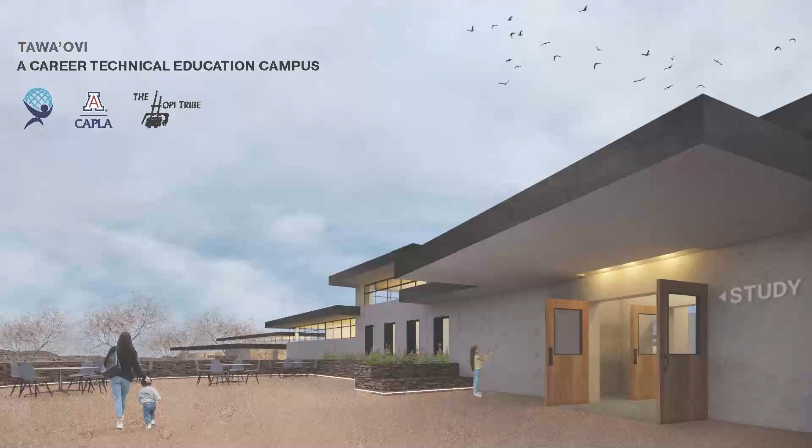The University of Arizona would like to introduce the Tawaovi microcampus. In January of this year, the University of Arizona solar decathlon teams visited the Hopi Reservation to meet our clients for this project, the Hopi tribe of northern Arizona. They invited us to propose a potential design for a microcampus at Tawaovi, their new off-grid community.

While on the reservation, we were able to speak with clients and local community members to gain a better understanding of the vision for this project. Here, we were introduced to many people, such as Andrew, who had been a key advisor for our team on the Hopi perspective throughout this project.

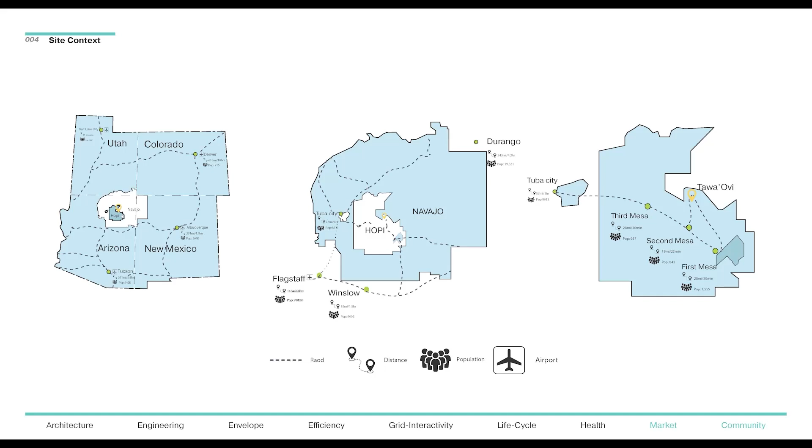To give context, the Hopi Reservation is located on the Colorado Plateau of the Four Corners region. The reservation is about equidistant to local cities such as Winslow, Flagstaff, and Durango. Our site is on the north of the reservation, away from major population centers in 1st, 2nd, and 3rd Mesa. The reason for this is that our client, the Hopi tribal government, chose to build Tawaovi outside of clan-owned land to protect ancestral boundaries. The blue area on this map is clan-owned. These lands surround historical major population centers that local leaders have maintained for centuries.

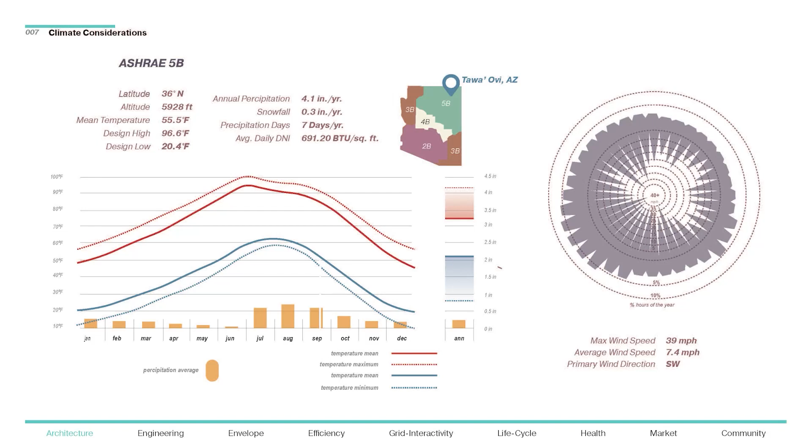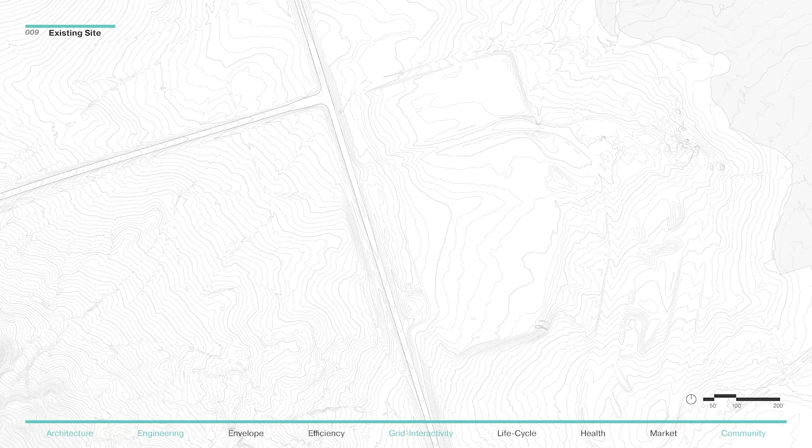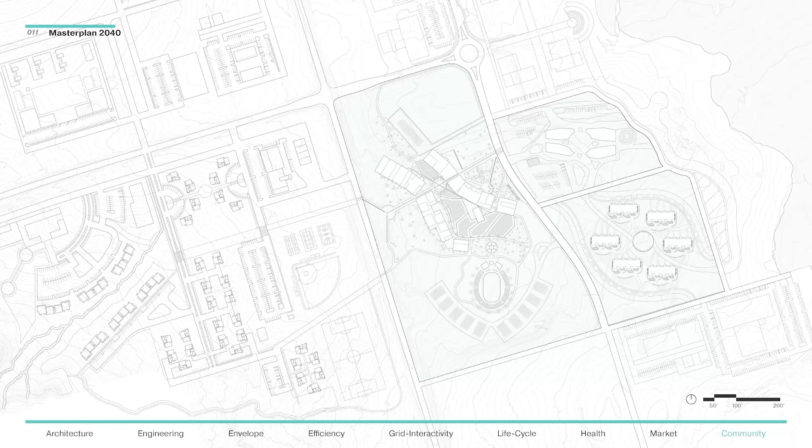The current Tawaovi site is untouched, isolated, and off-grid. The site is only accessible by the main road. The University of Arizona's scope within Tawaovi is shown here. Our project, highlighted in blue, is the largest site and acts as the central hub, connecting the main road to the multifamily and attached housing developments planned east of the campus. We envision Tawaovi becoming a new city and cultural hub for the Hopi people. As the community grows, the 3 University of Arizona projects will become integrated into the larger master plan community.

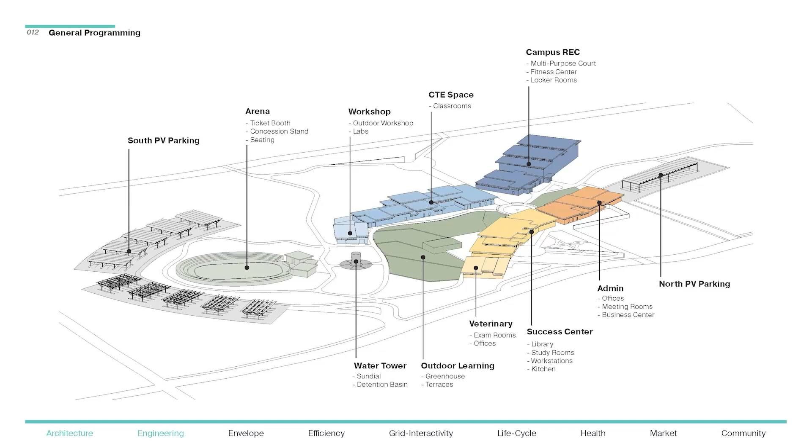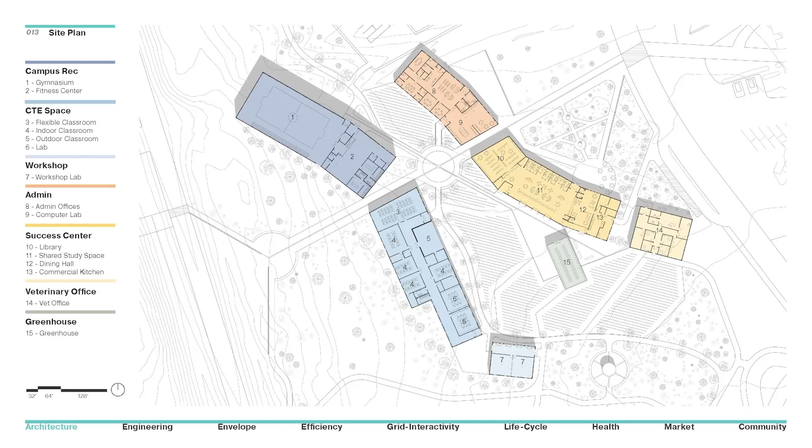Within the scope of our site, the campus is broken up into smaller buildings. The focus is on fostering a microcampus for the University of Arizona with an emphasis on agricultural education, culinary school, veterinary school, and metal and wood fabrication workshops. With 6 main buildings total, the program was requested by the client. In the west, highlighted in blue tones, you can see the campus rec, workshop, and central class spaces. On the east, highlighted in orange tones, there is admin, success center, and the vet office.

The building's basic form began by organizing the program. Our next goal was to preserve the existing site by letting the buildings flow with the natural landscape, while terracing cornfields in the courtyard where the Hopi people can practice their traditional dry farming. The workshop was then bent and screens were raised on the western ends to protect the campus from the prevailing western winds. Finally, solar-shaded parking was added north and south of the campus to supply power to the microgrid.

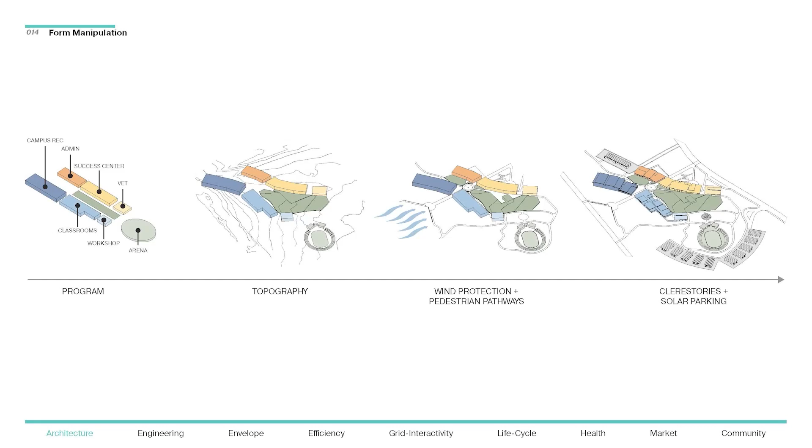The roof form and clerestories were added to increase the amount of natural daylighting and cultural resemblance. The materials chosen for the project are commonly found in Hopi vernacular. Natural materials such as mass timber, clay-based plaster, and local sandstone help ground the project within its environment.

We used timber-age prefabricated panels from local Durango, Colorado as our main wall and roof system. These panels use wood damaged by mountain pine beetle infestation that would otherwise be wasted. The wood is used to create CLT panels that we're able to ship to Tawaovi, where local workers and students can be taught to create prefabricated panels, developing new skills, lifting the local economy, but also contributing to the recovery of Durango's forests. These prefab panels are built particularly for this climate.

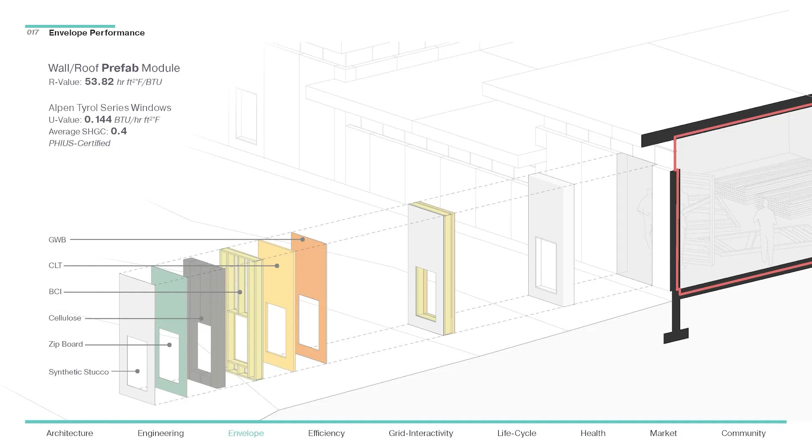The wall panels have an R value of 53.82, while the roof panels hold a thicker layer of cellulose with an R value of 71.8. Our windows are the PHIUS certified Alpen Tyrol series windows. It was important for us to achieve PHIUS certification with the envelope to lower the campus's energy consumption. Using prefabricated panels ensured an airtight envelope with no thermal bridging.

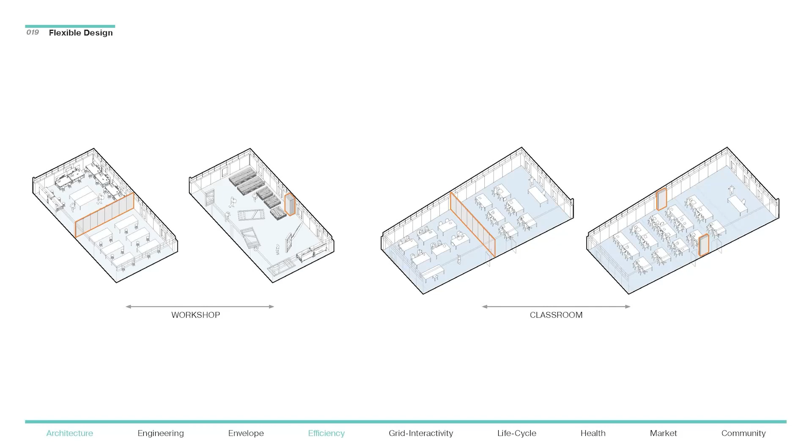One of our client goals, flexibility, was at the core of how we designed interior walls. Our spaces utilize retractable walls in the workshop and classrooms, allowing these rooms to adapt and accommodate a wide range of activities. Here's an example of such a classroom, where the retractable walls have been opened to create a larger lecture space. Various courses can be accommodated in these classrooms, allowing for flexible learning environments and student interactions.

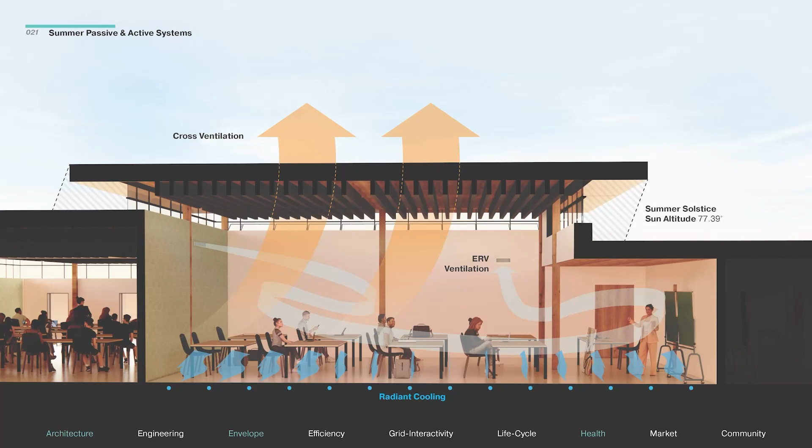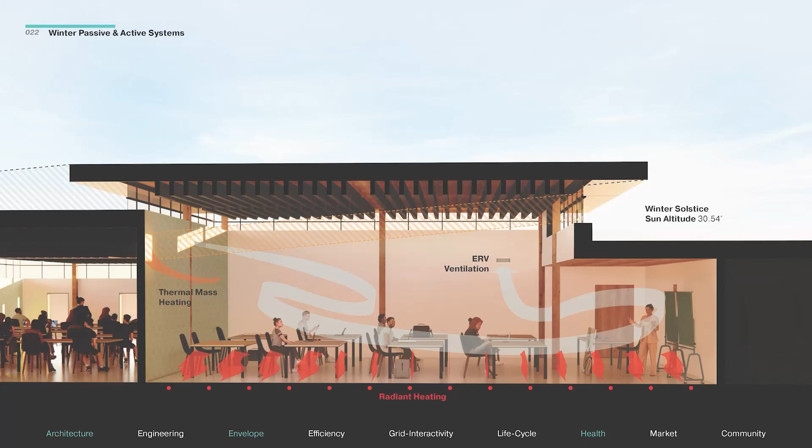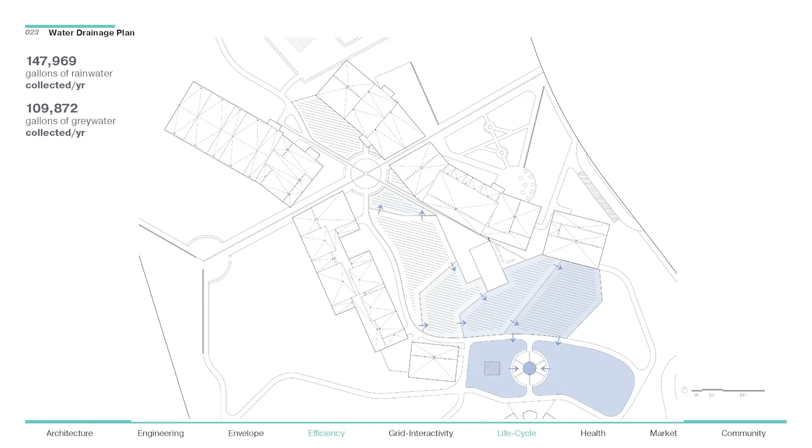One of the key parts of establishing resiliency within the project was a water conservation system. In such a dry climate, water was essential to the design. Through the terrace farms and our roof drainage system, the campus can collect nearly 150,000 gallons of rainwater annually. In addition, we can retain 109,000 gallons of water for irrigating terrace farming. When monsoon showers occur, rainwater flows from terrace to terrace, bringing the corn crops to life and routing excess water downslope to the water collection tower.

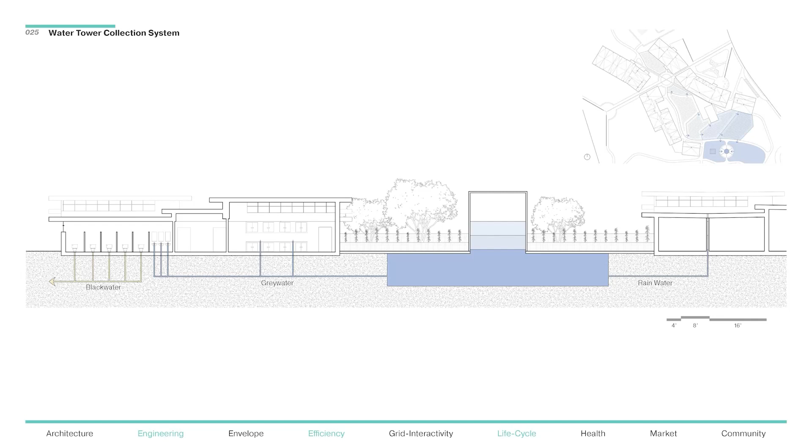The water collection tower then collects and filters gray water and rainwater. The water stored in the collection tower irrigates the terraces and native vegetation on site, while black water is routed to the wastewater treatment facility. The water then irrigates the terraces, as well as the vegetable garden and greenhouse for the outdoor kitchen. Here, students can learn culinary practices and have access to a wide range of homegrown vegetables.

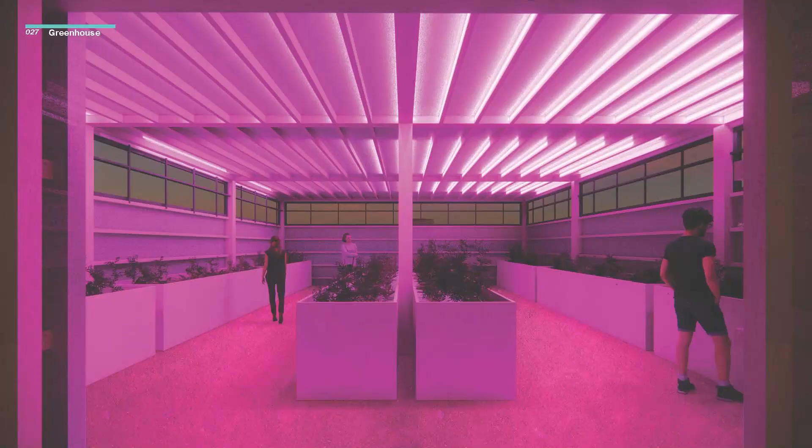The greenhouse can passively modify humidity levels to grow a wide range of vegetables, while the grow lights illuminate the space in a deep purple. At night, this space becomes a focal point of the terraces. This school is designed with the ability to function efficiently, even outside of school hours. Our electrical and mechanical systems allow for easy zoning of spaces, which work in tandem with passive systems to heat, cool, and light spaces only when they are fully occupied.

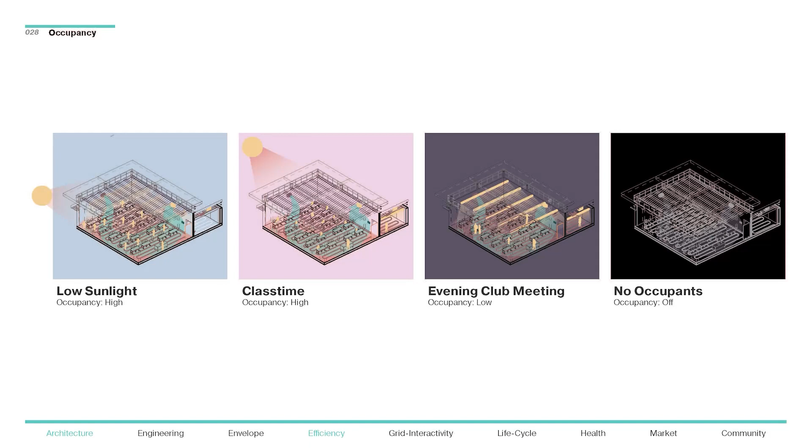Effective air control is necessary in an environment prone to harsh, dusty, prevailing winds. That's why we implemented an ERV system as well as monitoring windows, which work in unison to bring fresh air into spaces while exhausting stale air and removing harmful particles in classroom spaces. This betters health, and fresh air has been shown to improve attentiveness and cognition in students.

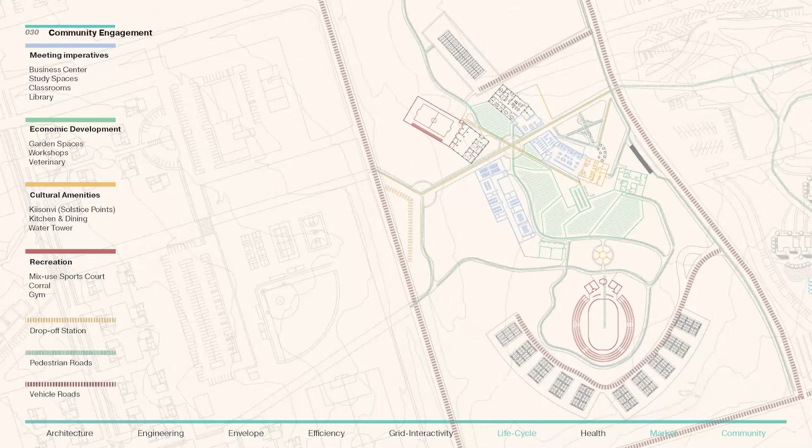Considering our client's goal for cultural continuation, the campus was designed to interact with the community through zones of interest. The campus's programs provide for community needs, develop the economy, establish cultural amenities, and create recreational areas. One such community engagement tool is the workshop, a focal point for this project, as it empowers the Hopi through hands-on learning. Participants can build, maintain, and engage in the construction process, fostering skills and confidence needed to shape their own future.

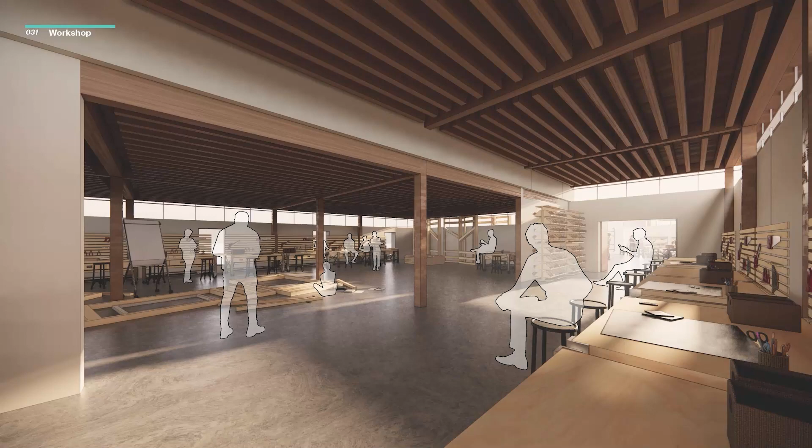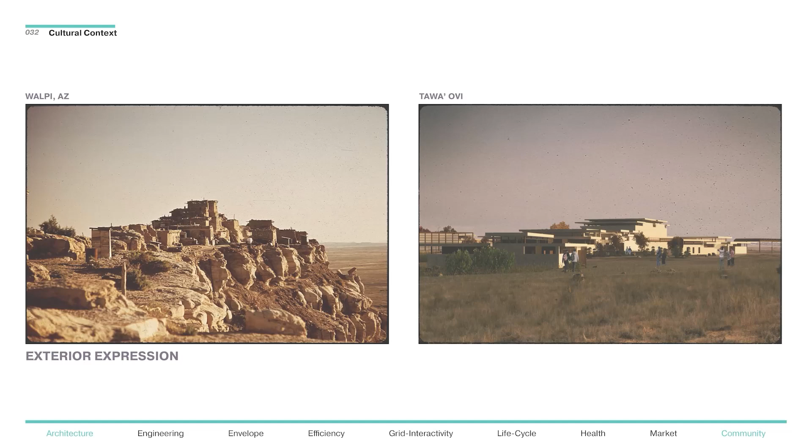The Hopi people expressed an interest in an architectural language that drew inspiration from their traditional styles of architecture. In developing the mass, it was important to maintain a Hopi identity when designing.

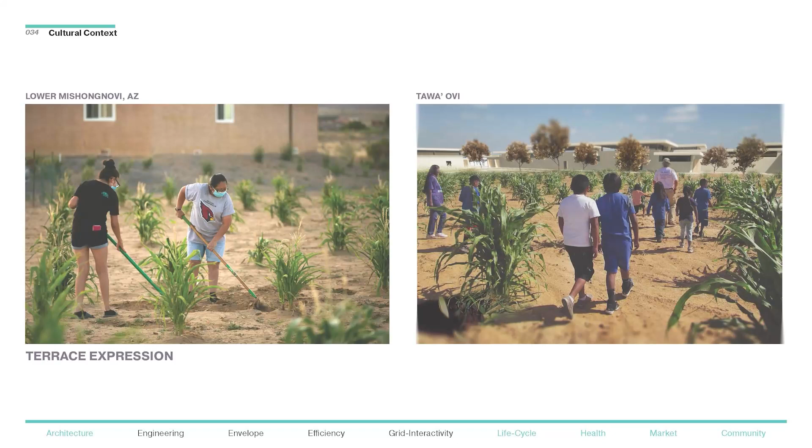We continued this language on the interior, using baffles in the ceiling that help minimize negative acoustics, while echoing traditional Hopi ceilings. In the terraces outside, we created spaces for the Hopi to continue the long-standing tradition of dry farming that has been used for centuries using resilient species of corn.

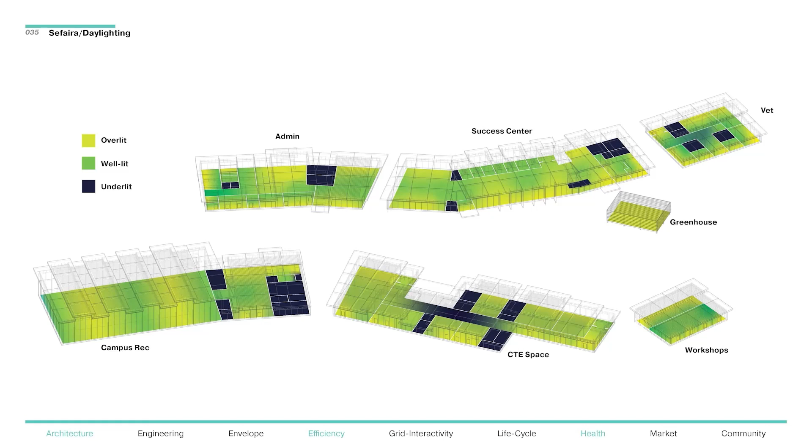To make the campus as comfortable and efficient as possible, we utilized daylight models to analyze the lighting conditions in the buildings. Clerestory windows are primarily utilized in the classroom spaces to provide well-lit desktop environments, while areas such as dining and study rooms utilize eye-level windows to provide dimmer spaces with intentional views outwards per Hopi request.

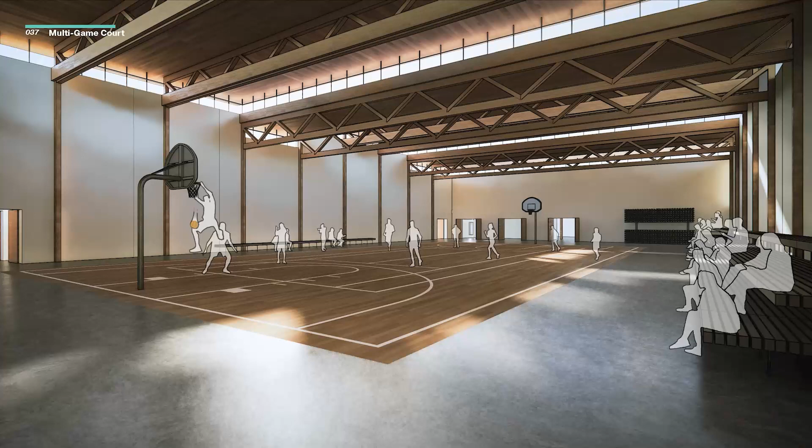The Success Center is a hub for productivity and social interaction. We tried to balance the cultural preference of having dim lighting while still being effective in task, thus creating a welcoming environment for the Hopi. Bright daylighting was also important for the gymnasium. A vibrant center for sports events, it includes a flexible multi-court for sports such as volleyball, tennis, and most notably basketball, a beloved sport among the Hopi.

The clerestories also aided in our energy efficiency, bringing more heat into the spaces in the winter than heat loss, as verified by WUFI. Together with highly insulated prefabricated wall and roof panels, we reached an EUI of -11. We fulfilled the requirements to achieve PHIUS Zero for new construction.

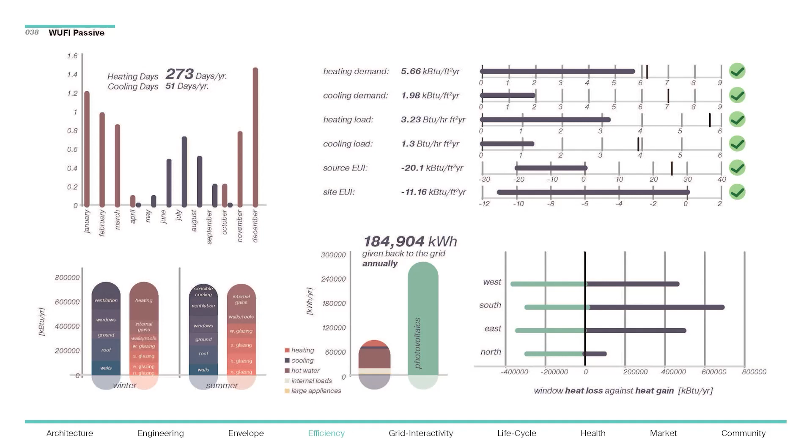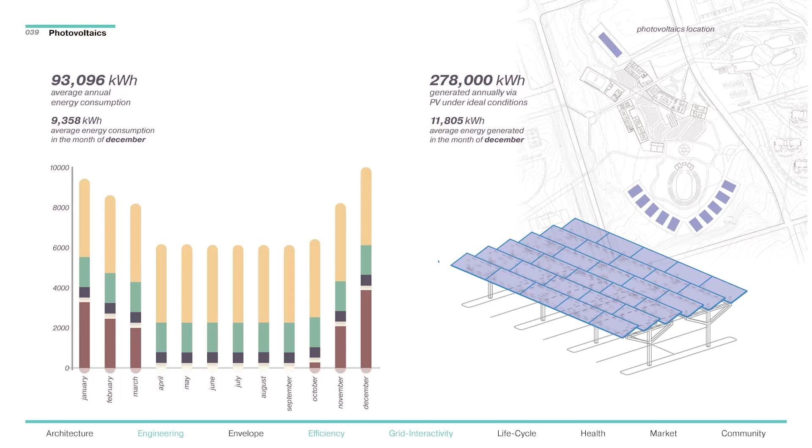Off-grid means needing excess energy to operate during peak loads in winter months around December and January. Our building's photovoltaics can generate 280,000 kilowatt hours under ideal conditions, offsetting the building's annual consumption even during the most intensive months. This means we can provide nearly 180,000 kilowatt hours of excess power to the rest of the community annually. This DC power feeds into the Tawaovi community microgrid, contributing to the overall power reserves across all Tawaovi buildings.

Supplementing the passive systems, we use a hydronic radiant system because of its ability to efficiently provide heating and cooling in our climate, where the dew point outside never goes above 60 degrees, which means we don't have to worry about condensation. To maximize efficiency, we split the building into zones for superior occupancy control and comfort. The air-to-water Chiltrix heat pump uses water instead of refrigerant for distribution. Compared to conventional or VRF systems, we have completely eliminated the chance for a refrigerant leak in the building.

In spaces like the gymnasium and Success Center, fan coil units respond to shifts in occupancy by providing additional heating and cooling. To ventilate, the energy recovery ventilator removes stale air and replaces it with fresh, reconditioned air. It conserves energy and has an 87% heat recovery rate.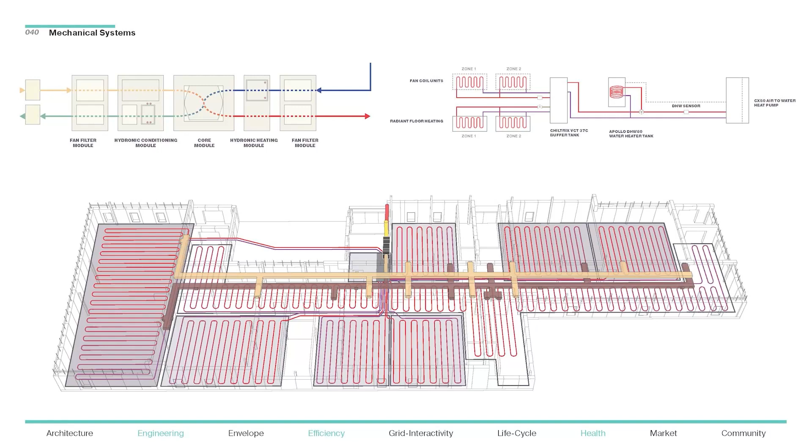In addition to our array photovoltaic systems, we have coordinated with Tawa'Ovi community to work within an islanded DC microgrid using BlockEnergy, a commercially available product we have partnered with. Excess energy is stored and used to offset loads throughout the community. Since energy demands at the campus peak at different hours than the housing developments, the stored energy can be redistributed where it's needed, keeping the community powered through the day, winter months, and overcast days by sharing excess energy, supporting our community self-sufficiency.

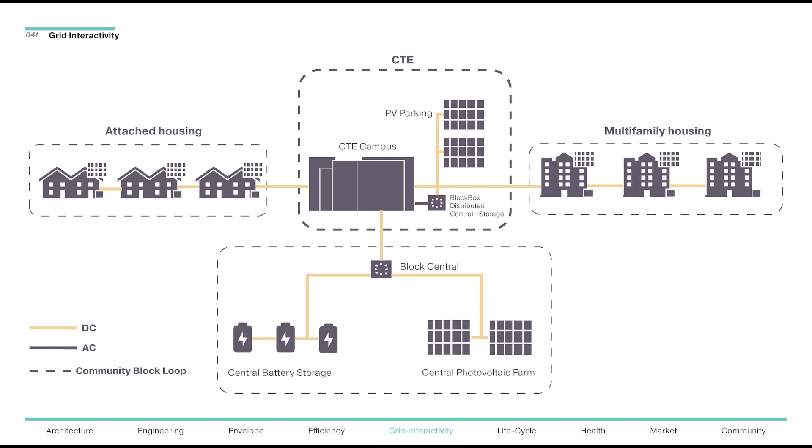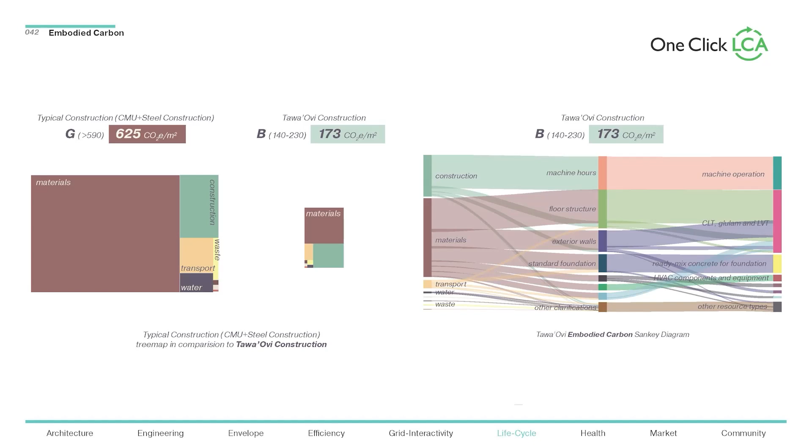Compared to typical construction, using our low carbon footprint materials acquired locally has allowed the microcampus to reduce embodied carbon significantly. Using One Click LCA, the campus proudly scored a rating of B, despite a remote site. Thanks to the reduced cost of domestically sourced materials, the campus will cost approximately $282 per square foot, compared to a typical construction cost of $300 per square foot for our site. We estimate that low energy and maintenance costs will save the Hopi people over $5 million over the course of the next 30 years.

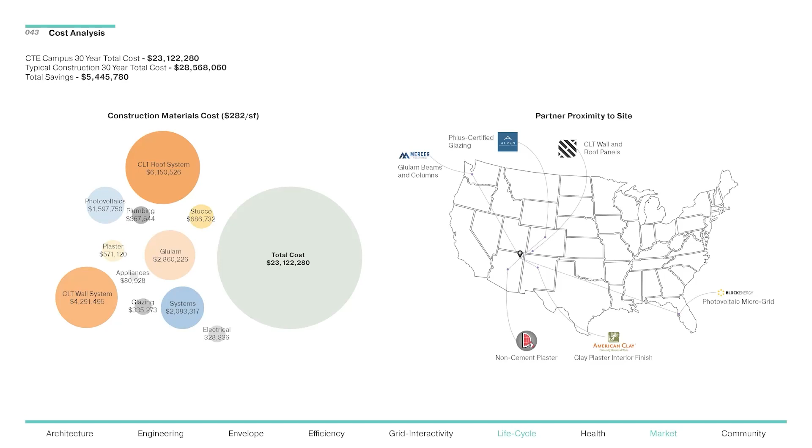In conclusion, with our clients' goals at the forefront, we look to achieve a truly resilient campus through our flexible and adaptive classrooms, water collection systems that reuse rain and gray water, massing and interior considerations that reflect and respect culture, and a highly insulated, efficient envelope that achieves PHIUS Zero.